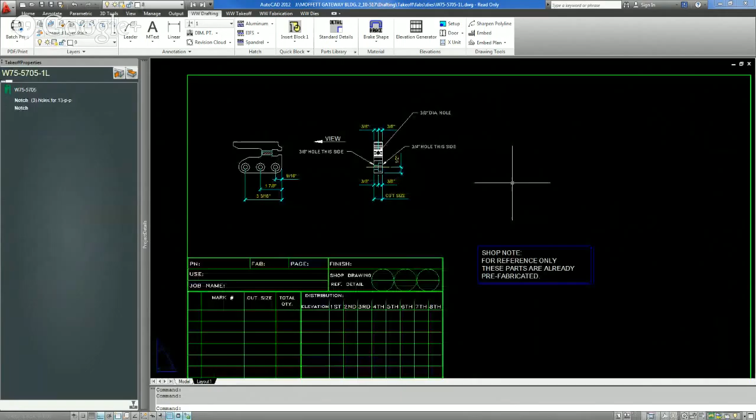Also found this die was created for our Moffett Gateway project we're working on right now, and I found this fab ticket for it, or fab template. It has some stuff on here, but as you can see, it's for a 3/8. So I'm going to make a new one for 1 inch, but I'm going to use this one as a guide so I get the holes in the same spots.

So let's go back. Back to AutoCAD here, I'm going to close this up. You can't really change this length in the BIM model. It's a fixed length part, and it won't allow you to change it. So I'm going to have to change it in the data.

So I'm going to drop all the way back out to my elevation here, and then I want to make sure my details are current. So I'm going to hit refresh there. I made some changes to this data in the BIM model, and I just want to make sure I'm looking at the data reflecting those changes.

And then I'll run UP on one of these hooks. Takes me right to it. And then I can change it right here to 1 inch instead. I already made a 1R and a 1L, so that's perfect. I plan to take whatever I draw here for these hooks and put them on the server, so I'm going to take some special care to do those right.

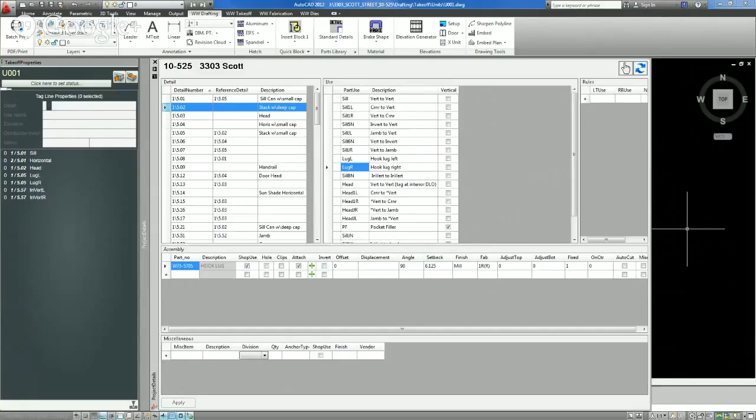All right, so UP again, so I get the 1-inch version. And save this, and then QBIM everything. Usually for units I do all. For stick walls I won't do all, hardly ever, because it takes too long. I'll do like maybe one vertical and the horizontals around it, something like that, or a couple bays, but never that many.

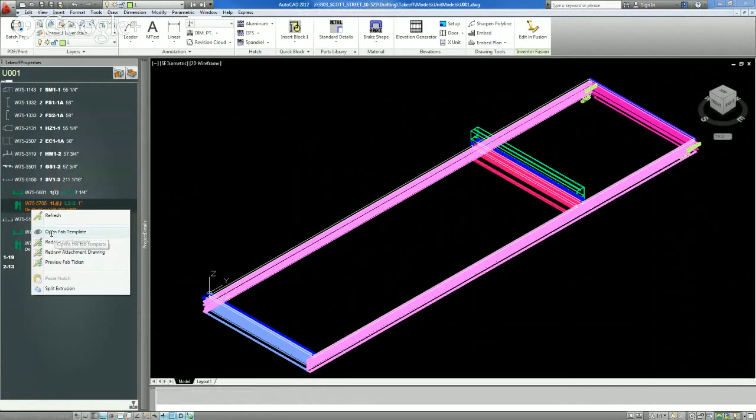All right, so usually I actually start from the top and just work my way down, but like I said, I'm going to skip to the lug right away. So let's open up this fab template. Now, the fab template is sort of a base fab drawing without any of the information in it, any of the text. And the takeoff program, when you're drawing fab tickets, will take this template and add all the text to it and produce the final fab ticket.

So this is kind of where you want to be drawing stuff because this will get repeated a lot. It'll use this template over and over and over again to make the fab tickets.

So here I want to add some notches to this thing. So I'm going to go back to the reference, this guy, and I'm actually going to start with these. I'm going to copy them over. So copy that guy and copy this guy. So I got both of them on my clipboard, and I can drop them in here.

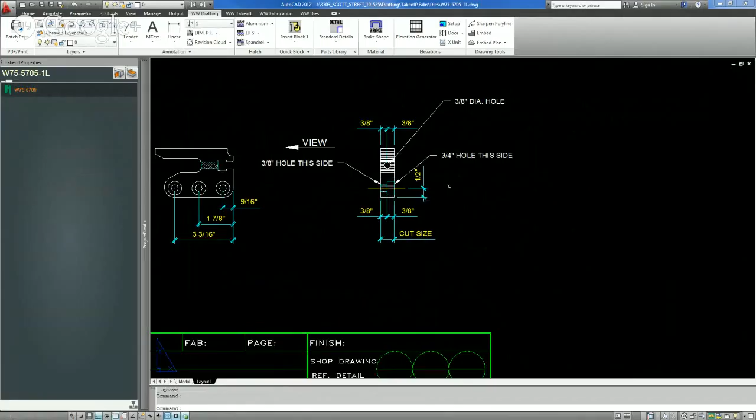Now these are wrong because, well, it drew this at 3/4, so I actually need this to be redrawn. So I'm going to save this. When I first drew the BIM model, the data said that this was 3/4 of an inch, so it drew this fab ticket, this fab template, at 3/4 of an inch. So I need to tell it that I want it to redraw this thing, and the only way to do that is manually.

So if I go back out to the fab ticket or the BIM model, it says it's 1 inch here. I can right click on this and tell it to redraw the fab template. And now when I go to open it up, now it should be the full 1 inch. You can see there, it's 1 inch.

Now all these notches are in the wrong places because it wasn't made for this. It looks like this one was made relative to this side and it kind of moved with this side as it got bigger. And then this thing was made relative to this side, so it moved the wrong way. I don't like how any of that is set up, and plus I have to change it. So I'm going to insert the geometry for these two notches.

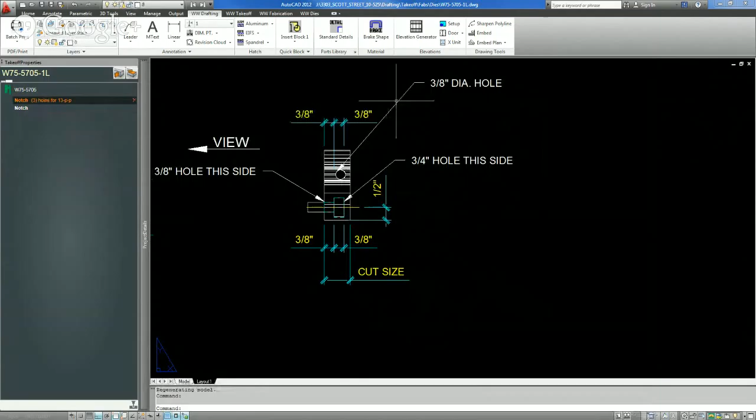Just right click and insert. That puts the solid that's used in the subtraction of that notch into the drawing in model space. Then I'm going to take the notes—these are also part of the notch—and explode them so that they're not part of the notch anymore.

At this point, I can just erase these notches because I can't use them as is. But because I inserted it and exploded the notes, all that extra stuff stays behind and I can manipulate it. So let's start with the actual notch geometry.

I'm pretty sure that this counterbore is going to stay the same depth. I'm not too sure, I'll change that if need be, but I don't see a reason why it would go to half to the midpoint.

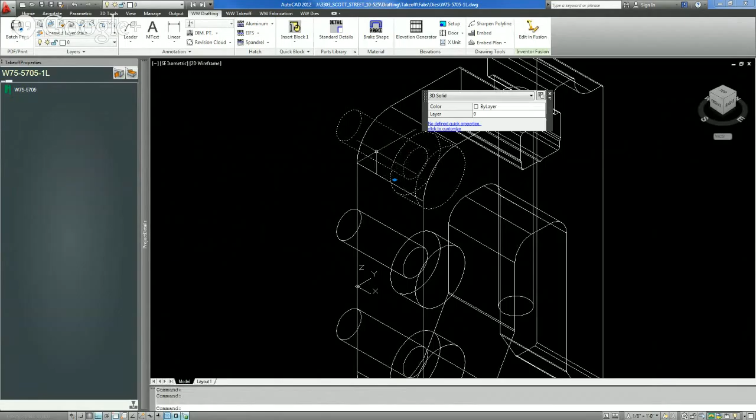So I'm just going to slide these over. I should slide them all—slide all of these over so that they're flush with the surface over here.

So I like using point filters for this kind of stuff. I only want to move this in the X, so I'll say .yz and then at. That tells AutoCAD I don't want to move in the Y or Z directions, only in the X. Then I can pick anywhere on the correct X axis, which is anywhere on this front surface, and now they should line up just like that.

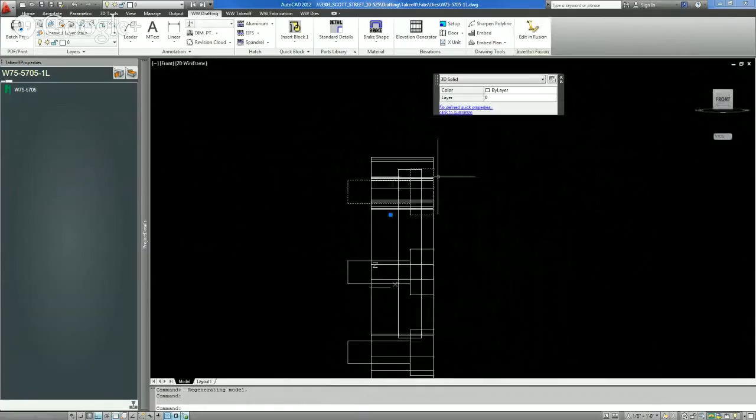You can see there. Some people will change to this view to do it, but I like to not switch my view so much. I think the ISO view gives you a good perspective, so that's done.

I do like to switch to this though to make sure my depth is right. I want to make this extra long in case someone needs more than a 1 inch lug, and long enough so that it's still a through hole. It's a full 3D solid, so I can't really edit it.

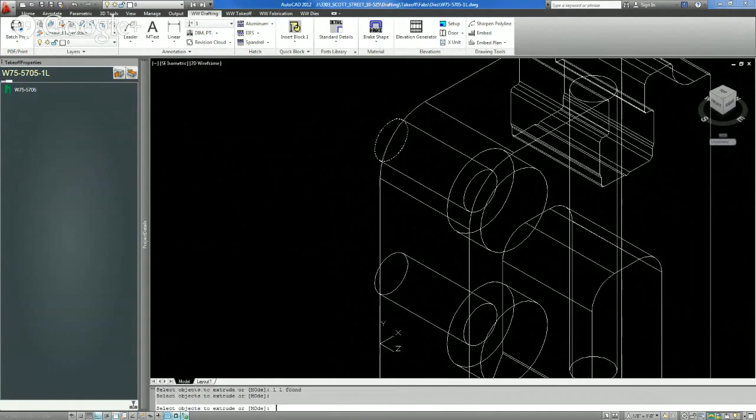I'll draw a circle at the end of it. So I'm rotating my UCS, draw a circle at the end of this thing at the quadrant, and then I'm going to extrude it out a little bit—out a lot. Let's just go out here a ways.

Then I'll—excuse me—I'll union these together, so that they're all one object.

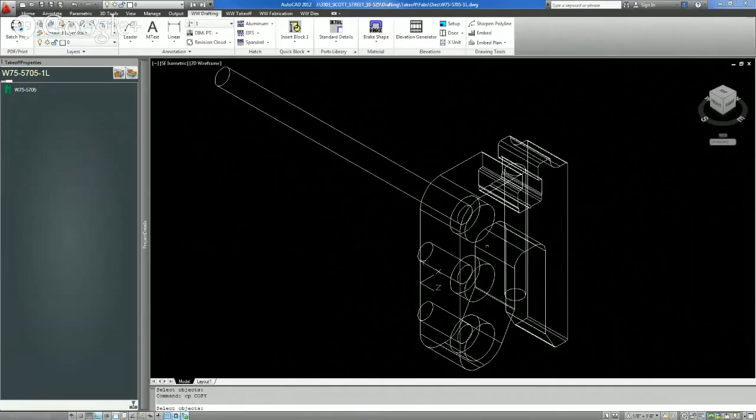And then I'll copy this from this center here to these other centers, so I have it everywhere. And then I'll erase the small ones like that.

And then I could make this whole thing a part of this notch, but as I understand it, sometimes engineering requirements will change, and then this will need 4 holes instead of 3. So I'd rather keep this as a separate notch, so you can leave that one there and swap this notch out. I do want to center this notch though.

So let's just do it in ISO mode. I'll move this, grab the center here. Now my UCS has changed because I tend to change it a lot. This time I only want to move it in the Z, so I'll do .xy and at, so it doesn't move in the X or Y.

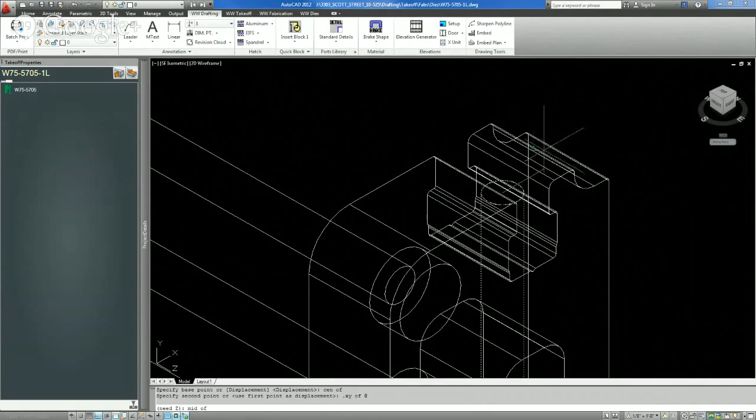And then for my Z, I'll just use a midpoint anywhere—any of these lines will work—and now it should be perfectly centered. And then that thing doesn't need to be extra long, so I think I'm okay there. Now to make the notches, use this button over here, notch extrusion.

Now when you decide to make a notch, you always want to pick on the— oh, is this the left? Yeah, this is the left. Okay, I had to make sure that this is a 1L and I'm putting the holes on the right side, so we're good.

You want to make sure that you click on the main object on the same end that you want the notches to move relative to. You saw when I went from the 3/4 inch to the 1 inch, the counterbores didn't move with this surface over here. That's because when the person made that notch, they clicked over here so that the counterbore stayed relative to this side of the extrusion.

What I want to do, of course, is put it relative to this side of the extrusion so that it moves with this side. So when I click on it, you can see it highlights only half of it as a reminder that you're using that side as the reference.

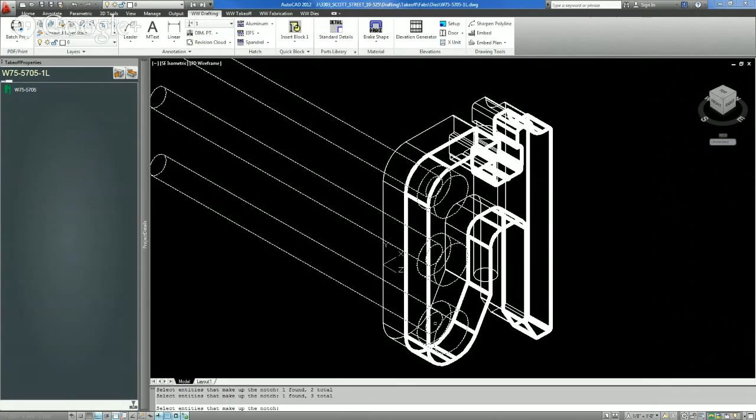And then you select the entities, putting all those 3 holes together. And then, yes, I want to add this. And now it's a part of this object. If I click over here, you can see there's a new notch listed, and it's those guys.

To manually erase these guys, I may change that in the future. So now I have this notch. It has the 3 counterbore holes. And I want to make another notch for that.

So notch extrusion, this one, because it's a midpoint notch, you're never going to win. You're never going to be able to pick a side because you always want this to be in the middle. Unfortunately, there's no way to do that. So I'll just pick a side, and we'll just have to make a new one every time the widths change or the lengths change, and delete it. So there we go.

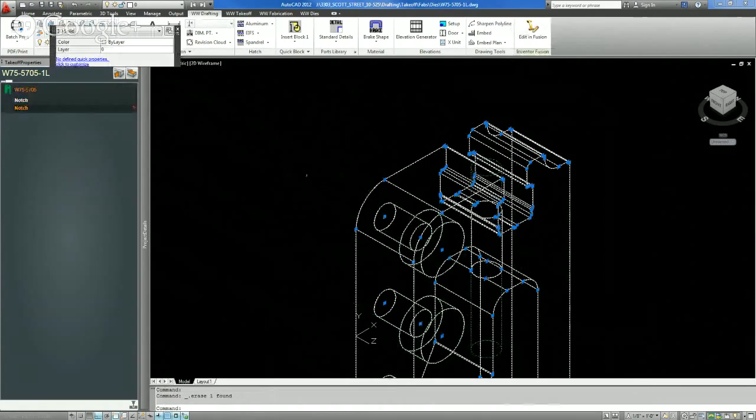Now there's going to be 2 notches here. I just have to go over here and fix all these notes. So this is not how you should be doing a counterbore. I'll fix that later. Usually don't do this either.

At least mechanical engineering wise, you're not supposed to do that. Mechanical drafting wise, just have this center line, just like they have it, I guess. I'm going to move all of these over to this quadrant.

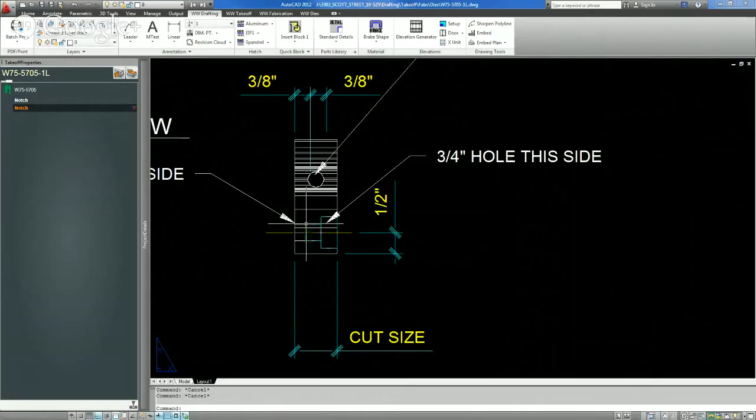Stretch these to that quadrant. For these, just fix those. This needs to point over here. I want to put this on the server, so I want it to look pretty good. That doesn't need to change.

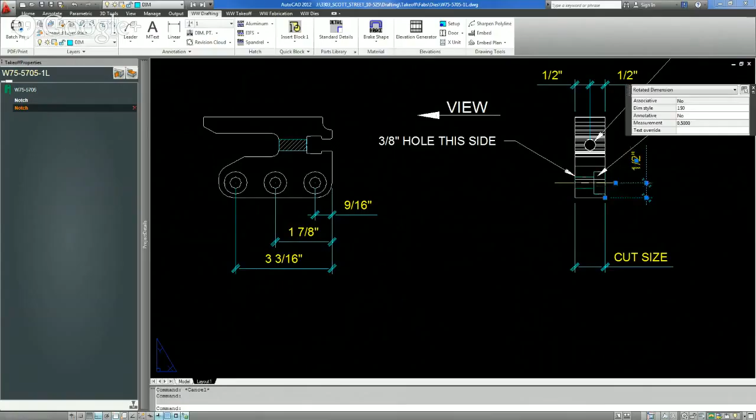That looks okay. I don't know why you wouldn't put the 1/2 inch over on this side. Let's just do that. I'm going to put it outside.

I like doing dimensions like this where you can see what you're dimensioning to, the geometry of what you're dimensioning to. I don't like dimensioning to things in side view like that. Sometimes you just do that because there's space restrictions and other considerations.

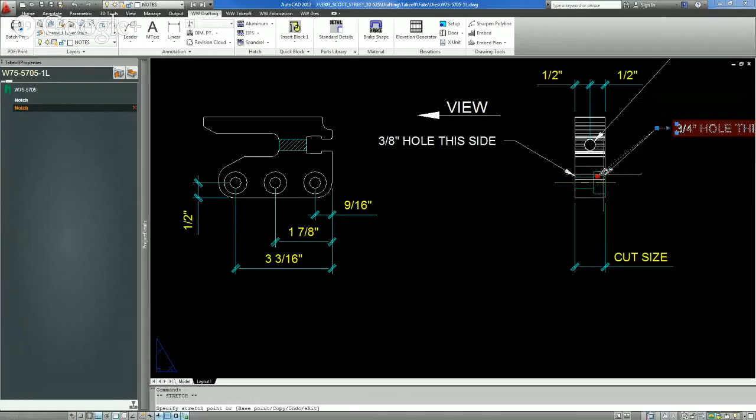But see how this looks hidden. Looks all right. Now I really don't like this. Should just say 3/8 inch hole on this side and then counterbore 3/4.

There's a symbol for counterbore, which is not in my list here. And that's lovely. Maybe that's why they did that the other way.

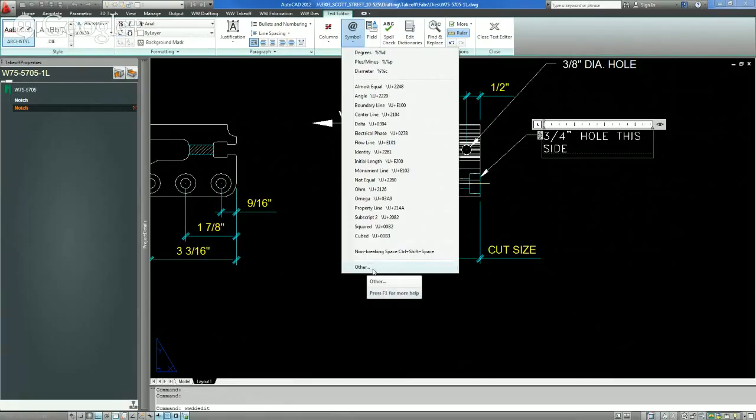Let's see what other means. They just bring up the character map. That's unhelpful. Man, I thought there was a way. I don't remember how to do that in AutoCAD anymore.

There's a symbol for countersink. There was a symbol for counterbore. I guess I just won't use the symbol. So it's a 3/8 inch hole with, I don't know, 3/4 inch.

3/8 inch diameter hole with 3/4 inch diameter counter bore, 3/8 of an inch deep.

Symbols for counter bore, there's a symbol for deep, there's a symbol for diameter, but I don't think we use any of those. So I don't think I've ever done a counter bore in this company. So it's all kind of an experiment. Let's, can't get that to go right. Whatever, yeah, I don't like that either.

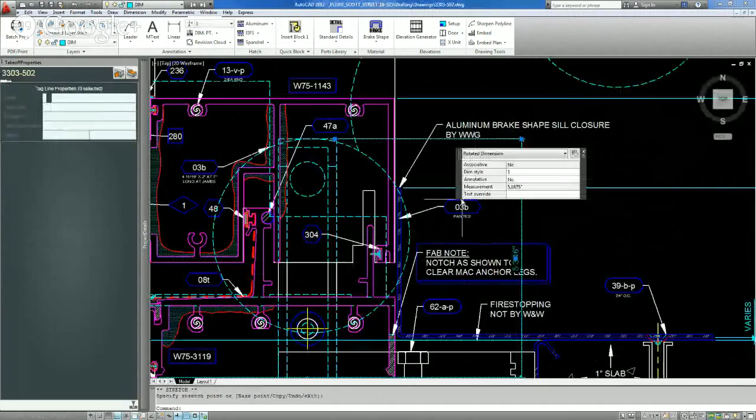Let's take a look at the detail, because some of the details are kind of inconsistent. We did find it in a detail. If I go back to, I think it's 556 or something, no, I'm just guessing.

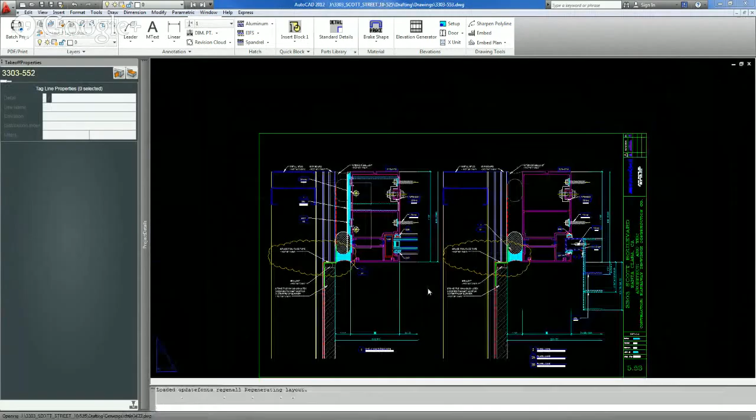There was a detail that showed it, but sometimes it shows it at 3/4, sometimes it shows it at 1 inch. Let's see this one, this one's 3/4, and it's showing the 3/8 counter bore, 3/8 inch deep counter bore.

But then on some of these details it shows 1 inch, and the checker found this for me. I just don't remember what detail it was. We saw it on a different elevation, like this. See, that's a 1 inch, but it's still a 3/8 inch deep there.

So it's calling 13 pp here. Let me double check, make sure 13 pp. Yeah, that's a, well, doesn't really say. It's 13x. Let me pull in 13 p. That gets me really worried.

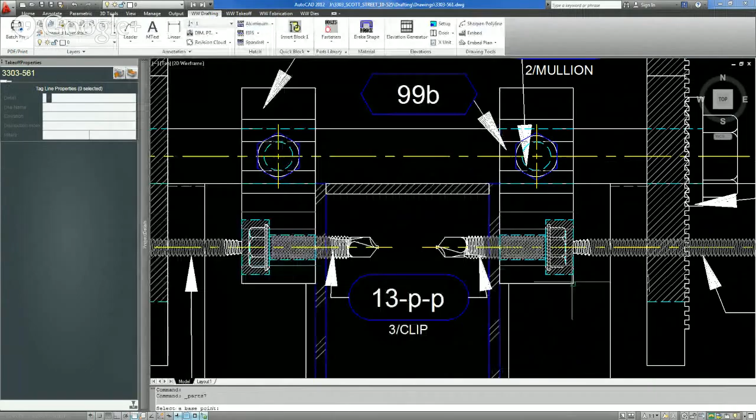Let's see what a 13 pp actually is. It's 5/16, 1.5 inch. That's not a 13 pp at all. Wait, I got it on the wrong spot. Move. Yeah, 13 pp does work.

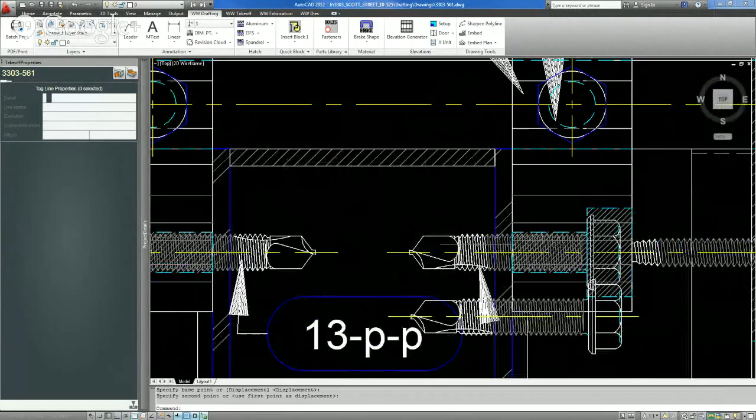Just want to make sure that it goes through here with enough of the gray threads, because you're not supposed to fasten to the white threads. Those are hardened for drilling.

It looks like it's the right size. Not sure why the picture says X.

See, that's 13px. This one's 13xx. I have no idea where that came from. Let me line these up. I've got to make sure they're the right diameter now.

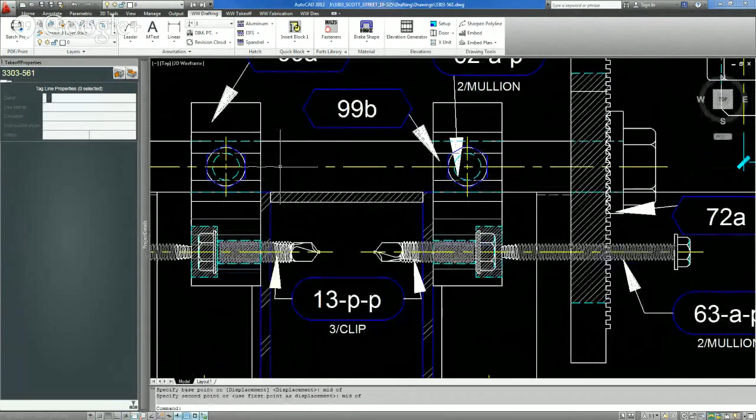They look identical. Not sure why that block is a different name. Well, 13pp sounds right. I don't know what they took off, but if they follow the detail, it would hopefully be 13pp. Let me check a couple more details, because I think some of these details are inconsistent.

Here's another 1 inch. It's calling 13pp. I wonder what 13xp is. Let's look that up.

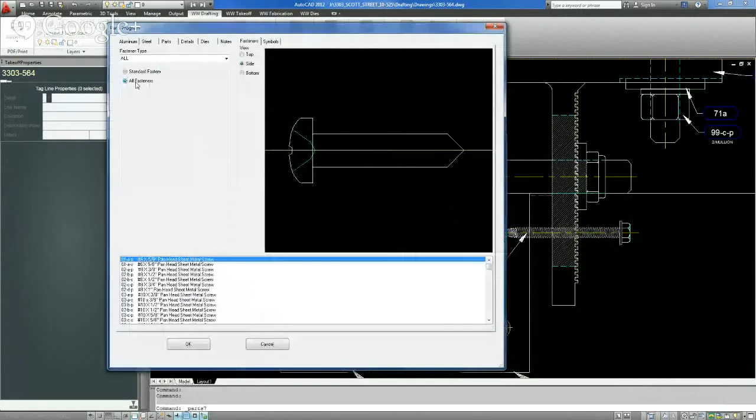Gonna work out through the list. 13xp is the same size with different thread count. Same length. Let's see, one's 24, one's 18.

They probably both work. I don't know. More threads is better, right? Stronger. So worst case scenario, we got too much rather than too little, which is a good situation.

Just find that interesting. Oh, sounds like 13pp works. So it looked like it was 13pp on a couple of these details now.

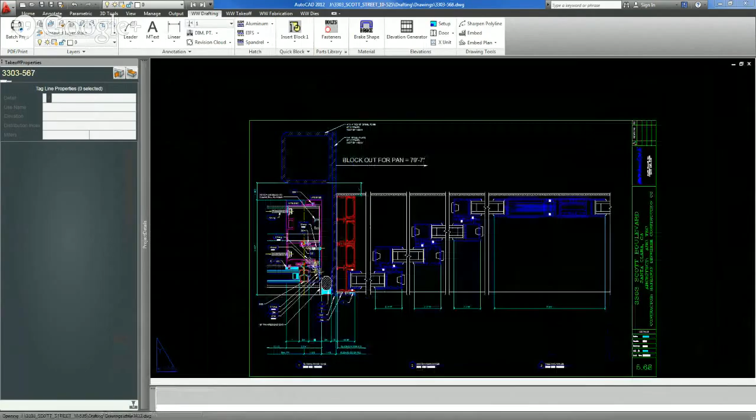Yeah, see, this one's still drawn at 3/4, but we're going to do 1 inch everywhere. So it looks like 13pp is the original size, so it didn't really have to change.

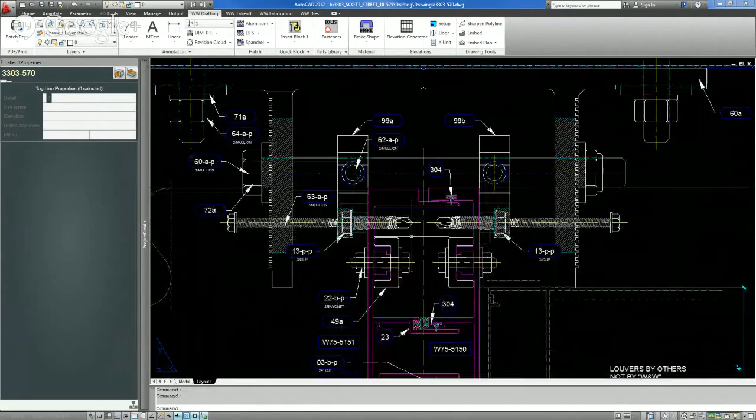Okay, I'm satisfied that what we're drawing is okay. That's the reference, let me close that. I don't need that anymore. Oh, I do need this note though, so let me copy that. That's not part of any of these notches, so I need to copy that over it all. Paste that in.

I'm satisfied with this. Can't find anything else wrong with it.

All right, so I'm going to add some notes for my notches. Since I plan to put this on the server, I'm going to do that. I'm probably going to do that for all the things I make for this setup, so that the person who inherits this thing will kind of see what I did.

3 counterbore holes. And then this notch here is the... I don't know what I'd call this.

It's an adjuster screw, right? 3/8 inch adjustment hole, sure.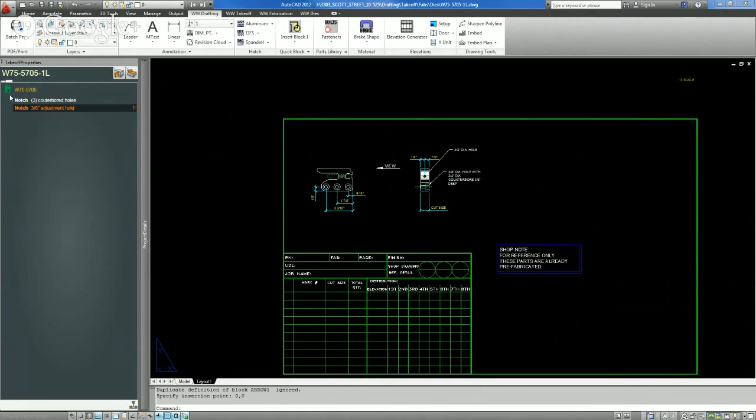They put a nut in here, and then they run a screw through here, and then that screw they can put it down to lift the unit up or set it back to drop it down. So just call it an adjustment. That sounds pretty good.

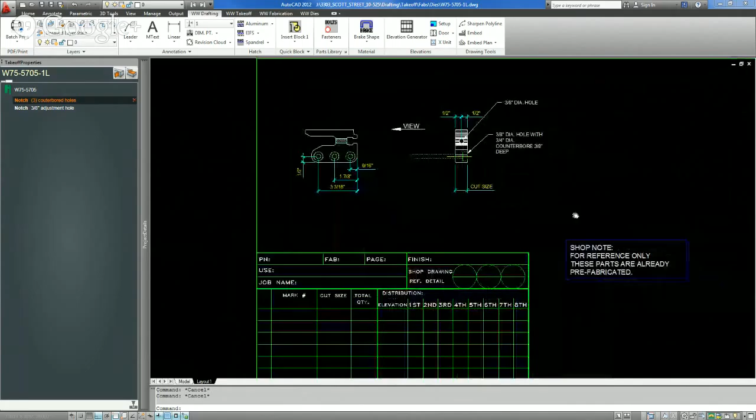And then I want to attach all of the appropriate notes to the notches here. So, edit note. This makes it so that the notch subtraction comes with the notes, so that when you copy them around, they move together. So I'm going to add to working set.

I want this note, all of this stuff, and all of this stuff, like that. You can see it gets bright, showing that it's a part of this thing. And then save changes. So now when I select this notch, it highlights all the notes.

If I erase this notch, all of these notes disappear too. If I copy that notch, the notes come with it. It's really, really handy.

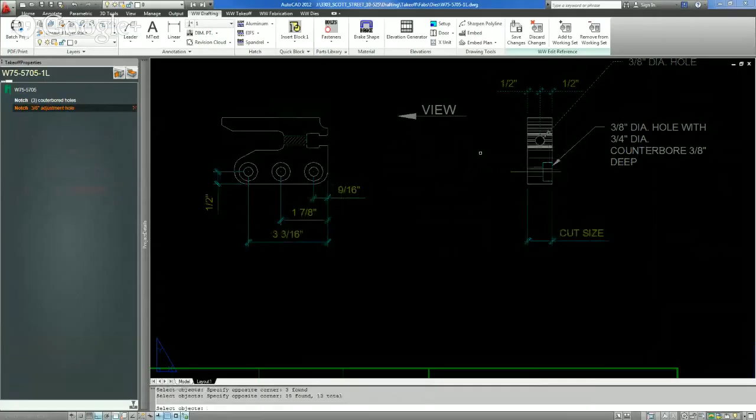Do the same for this. Edit note, add to working set. I want these guys and this hatching here that shows that it's through. Save changes.

Okay, that's all we need on this fab. Yep, can't think of anything else, so I'm going to save that.

Now what I want, I'm going to make the 1R fab now. And it's going to use this thing, but it's going to be mirrored to the other side. So I'm going to mirror copy this.

And then for this thing, I'm just going to copy that. So I'm going to add that as a copy. And then I'm going to close this.

I guess I could go on to the next one, but I'm pretty sure I'm going to have to redraw this fab template. So redraw the fab template here for the 1R and open fab template.

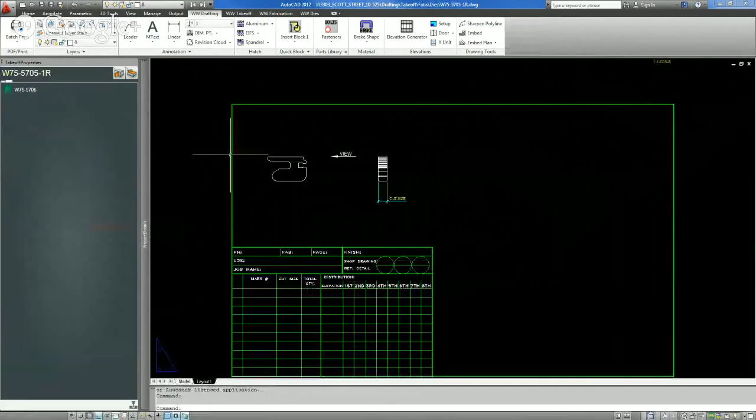There we go, I can paste all these notches. So there's a little bit of a mirroring problem.

It assumes the part is the full 30 inches, or 10 inches in paper space. So it always mirrors the notes like this, but that's easy enough to fix.

Just go here, I edit the note, and then I can slide all this stuff over.

Just like that. It worked out fine when I mirrored it.

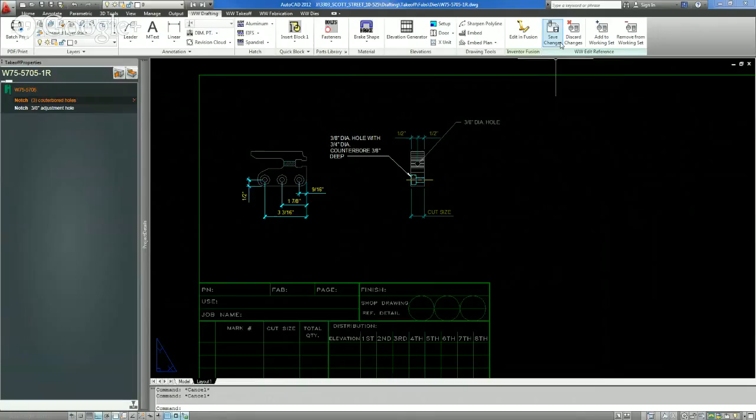Oh, you know what I want to do? I want to add hidden circles on the other fab because the counterbores are hidden. So let's do that after this.

Because I added the notes to those notches, all the notes came in. It's really a time saver, especially if you have a lot of variations or little adjustments to do on your fab templates, to be able to just copy the notches around. It's really handy. Let me go back to 1L.

So I'm going to need to copy this too. I haven't forgotten that, but I do want to add in, because when I hide this, if I do HA, you can see you only can see the small hole here. I want to add a hidden line so that you can see the big hole, so you know there's something more to this thing.

So let's do edit note. Once you're in edit note mode, anything that you draw will automatically go inside the note. So I like to start it first and then start drawing things, because I find it easier than having to run another command and add these to the working set. I can do it this way.

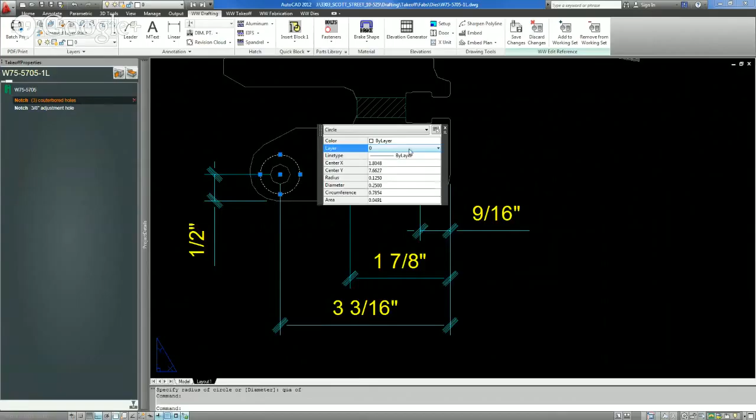Layer, I want hidden. And I want to copy. Last, center, center again, center again.

I only like to run snap endpoint because that's the one I use the most. I guess I could turn on center, I just haven't gotten around to it. Maybe I'll do that now.

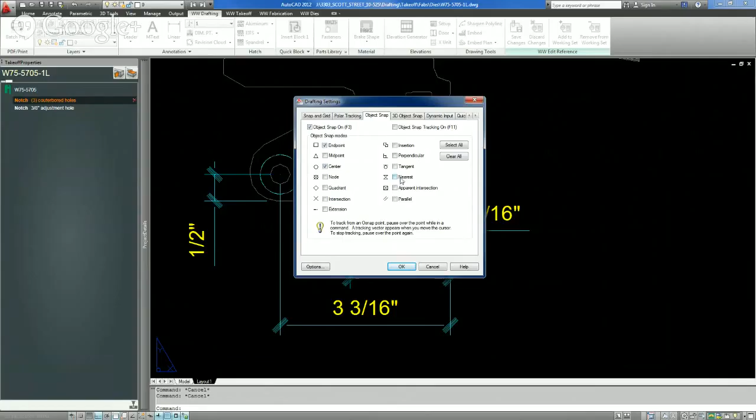So for running snaps, yeah, I usually only have endpoint. Center doesn't really bother me having that on all the time, so I'll do that. But midpoint drives me crazy when it's on. Perpendicular does too. Nearest is probably the worst thing to have on all the time. So I like to keep it pretty simple on that side.

So I'm done with my changes. I just save them. And now when I do the hide, I can still see the hidden line there, and that makes me feel better about the whole thing.

Save this one, and I think I'm done with those two. I'll put those on the server later.

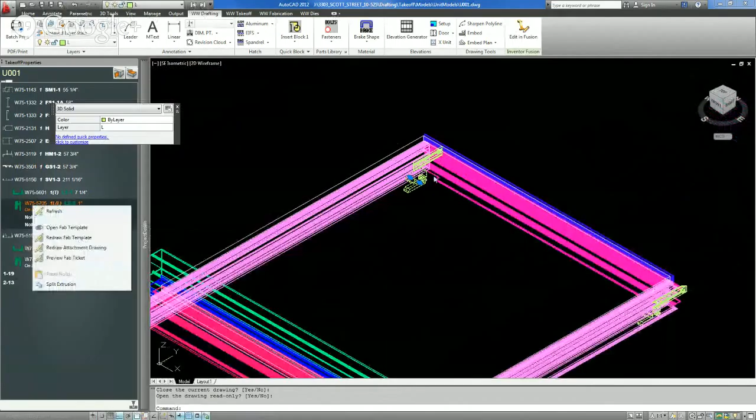So now that those are there, you'll notice that they're not in this BIM model. That's because I made this BIM model a while ago. I could right click here and refresh it, and that brings in whatever I did on the fab templates onto this model. But I'm just going to back out and go all the way to the beginning. I don't really have the UPD because I didn't change any data stuff.

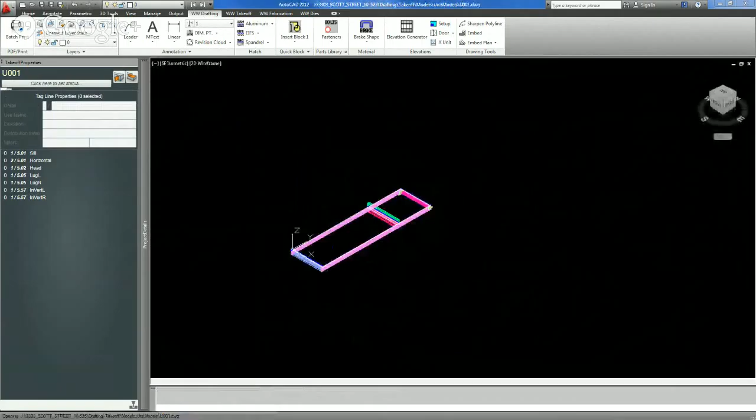QBIM this. It's going to redraw the whole unit again, and it should have the notches. It's a good time to check to make sure I counterbored the right side. It looks like I did. You can see them from this side. You can see the hole.

You can see the counterbore, extra large. And then again on this side. So looks pretty good.

So I'm just going to go down this list and fix all the fabs, starting with this guy. This is the sill. I don't think I actually have to do anything on the sill except possibly add a gasket. So let's just open it, take a look. It's pretty basic. Looks like there's a gasket there too, and I'm going to have to add that gasket.

We only add the inside gaskets onto the fab tickets. So, and this is fab 1. Let's just do that real quick because I know I'm going to have to do it.

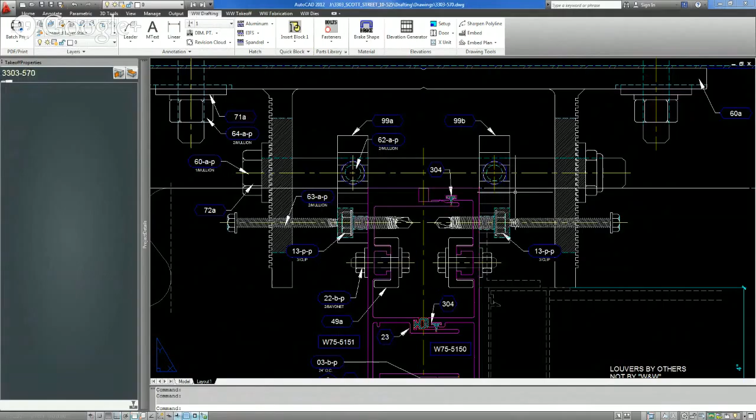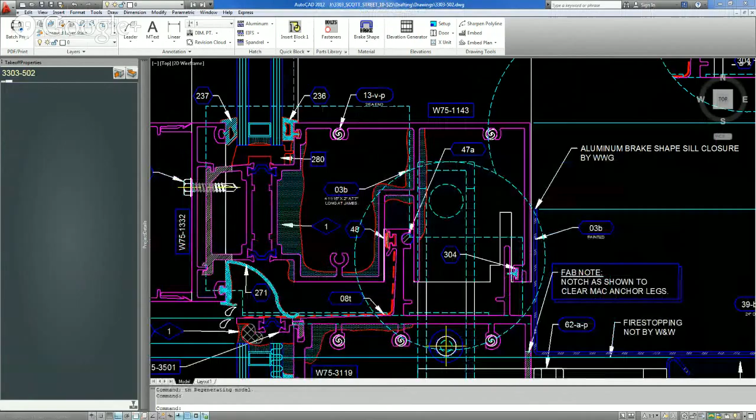So the way I usually do this, I don't know, maybe someone has a better way, but I tend to go to my detail and just copy them out. Ultimately, it doesn't really matter what it looks like as long as you're calling out the right number. As long as I'm calling out 236 and whatever this one is, 304, it should be fine. But I like to just get the graphics out of this.

So I'm going to copy all this from this inside glass pocket there. Grab those guys and this. I'm not going to grab these because they're going to be the wrong scale.

I insert it. I want to insert it at the same glass pocket right there. So I got one here and I got one kind of hiding out over here. And then I like to rotate them first, so rotate both of you guys around the same glass pocket. And I want to go this way. Yeah, like that.

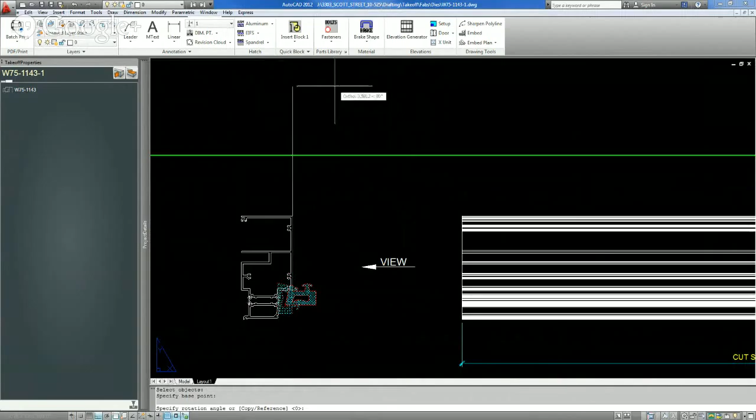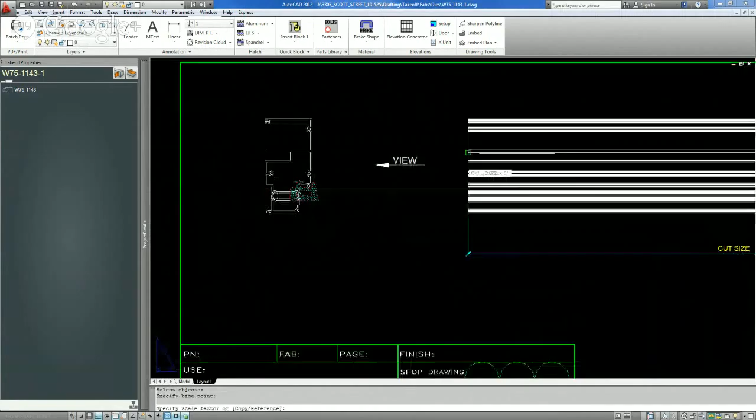Yeah, just like that. I want to mirror previous around that glass pocket again. Erase source, yes. Then I want to scale previous around the same glass pocket, and the scale of this drawing is 1/4. Bang, they're both in position. This is where having 2 monitors is really handy. 236 and 304.

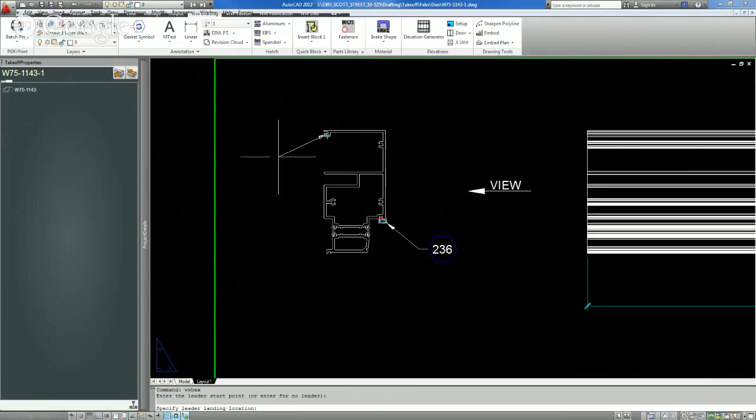So I'm going to drop in the gasket symbol, 236. I think I'm okay pulling it down here. I'm trying to anticipate where other notes or features might need to get added to this fab. I think I'm pretty safe throwing it over here because there's no surface for me to attach something, so there won't be an angle or anything like that. Over here, I probably want to pull this further out. There could be...

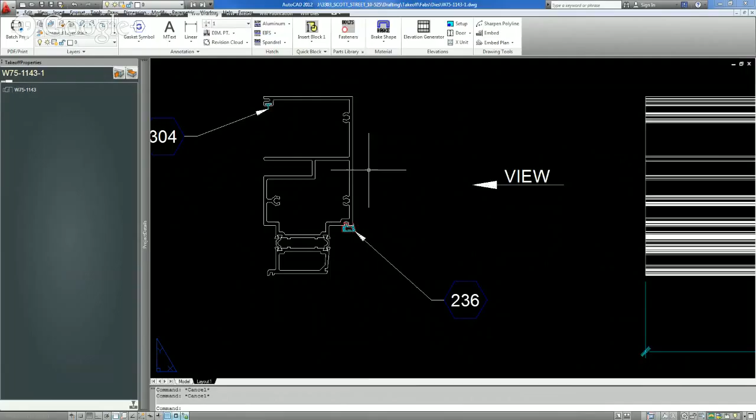...an angle, maybe an angle in the front, something like that, at a parapet, or maybe there's some kind of thing here. I'm a little worried about this one. I don't want to put it over here because I don't know what kind of angle might be coming off the top of this on other fabs. This is Fab 1, so I'm trying to think of those kinds of things because this is going to be the basis for all my future fabs.

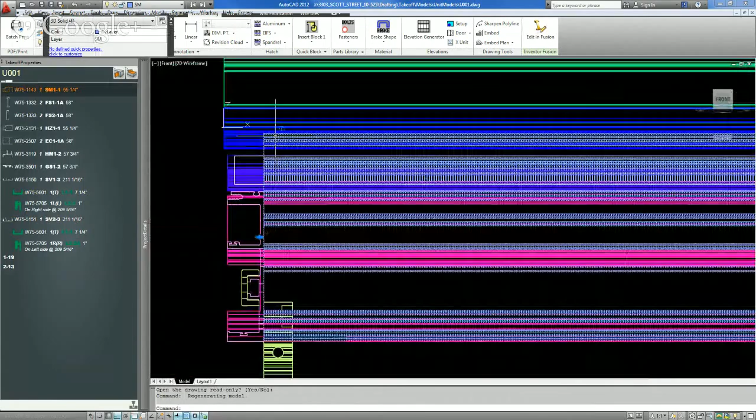As far as notches on this thing, let me save that and go back to the BIM model real quick. We decided, I think, that there were no notches on this, so this is the light blue part, and it just runs straight. Because this is Inviso to Inviso, or structurally glazed to structurally glazed, there's no face stops out here in the front, so I don't have to make any clearances like we did on captured to captured stuff. I don't think there's anything else to this fab. It's just straight cut with gaskets. Best kind of fab.

Now there may be a situation where I need to turn on the chart at the top because there's some attachment at the top of this thing, but I'm not going to do that on Fab 1. I might make a Fab 2 or something that has that, but that's up for the next person after me to deal with when they run into some crazy unit.

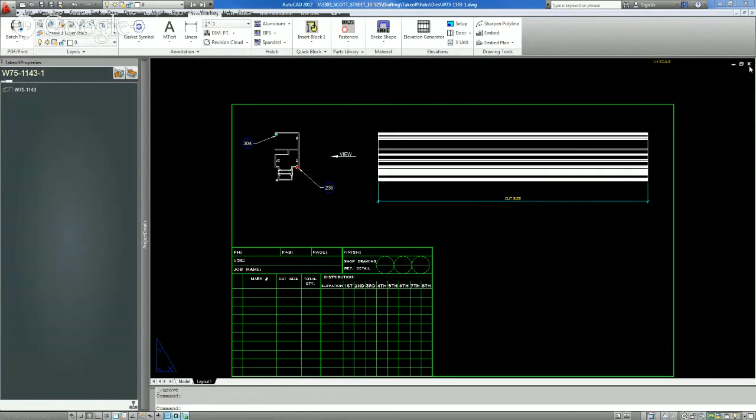Happy with that one? Okay, so after the sill comes this piece, which I don't know where it is until I go over here. Okay, so it's the face stop on the horizontal. I made this Fab 2 because I wanted to put that 1/32 short note.

This is an outside part, so I don't need any gaskets here. There's no notches to speak of that I can think of because we don't weep these anymore, since they just run out the sides. So I think all I need is that note.

So there's probably a place where I can copy it. I don't think I have it saved on any one of these, so let me go grab one. I'll grab it off the standard one on the server. If you open, you go to S drive, fabs, and then probably the most common one is going to be Fab 2 of the face stop, the W75 face stop, whatever that is.

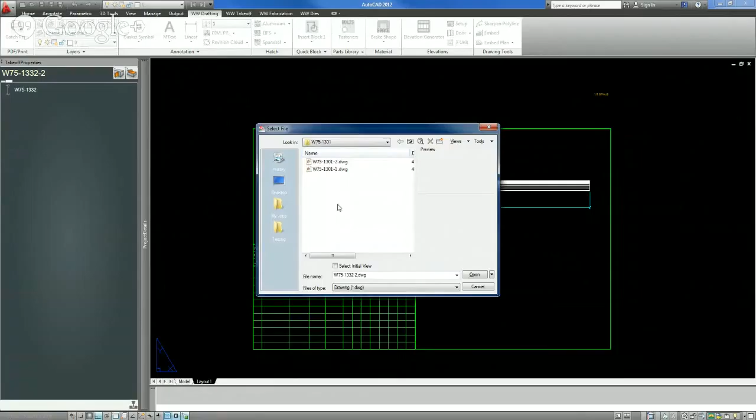It should be 1301. Fab 2, let's see, it has that note down there. That's what I'm looking for. Cut part, 1/32 short of cut size. Copy that. Actually, let me put it on my block thing.

I hardly ever use my quick blocks because I usually just use Control-C, but I think I'm going to make a permanent home for this one because I do use it a lot. So I'm going to make that. Yeah, I'm never going to remember that. Yeah, whatever, you got to put it on Block 1.

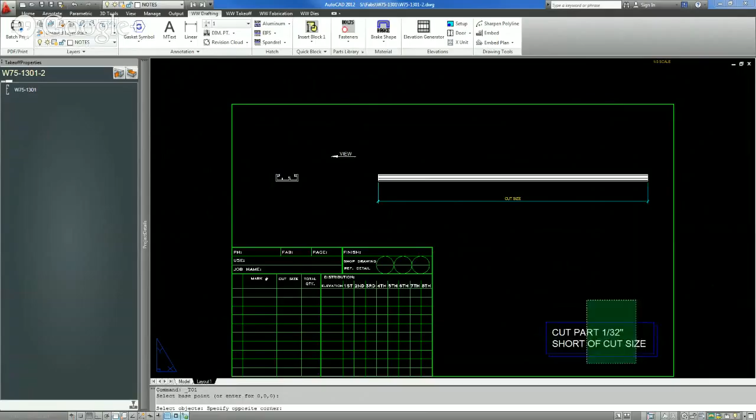Cool, and I'll erase this or close it without saving. I have access to the S drive, so I don't want to save the fact that I got rid of that thing. Paste it in. Oops, Control-V, insert Block 1, hit enter. There we go.

Nothing I can think of. There's no holes that go in here at all. They usually go on the cover if we run like a flathead to secure it. I'm pretty sure that's not the case on this job. Well, it might be the case. Actually, that thing's pretty big, it probably has that. Should probably look at the details too.

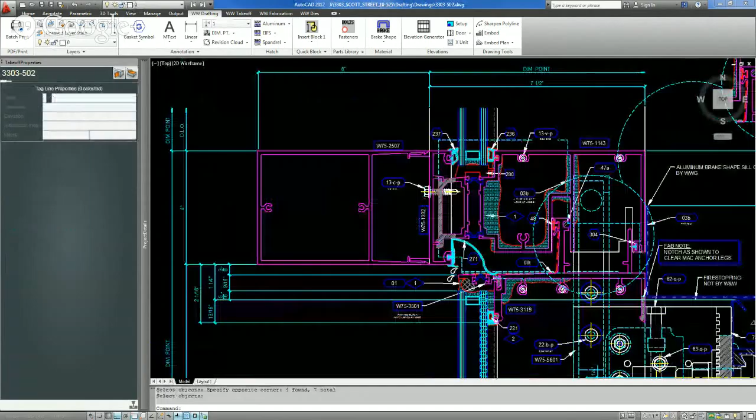There's no fastener here. Ooh, what's this? There's a fastener there. Is that on the horizontal as well?

Bad when you assume—yeah, there is a fastener there. I'm guessing that's to help support, because this thing is going to be sticking out here quite far, and they're not trusting these little hooks with it, so they're putting a mechanical fastener 24 inches on center.

It's probably only going to be at the places with these hooks, so I can probably just bake this right into fab 2. It's probably going to be on fab 1 as well—fab 1 being the one without the 1/32 short note.

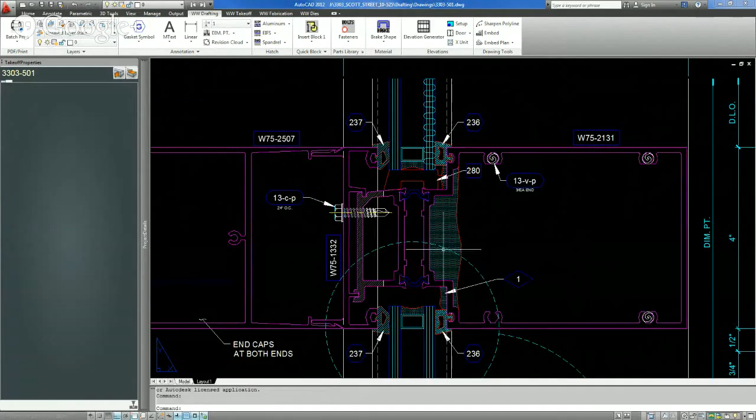Oh, look at that—they drew a notch here, but W75 doesn't do that, so I'm not going to put that in. He just hatched it. I think that's just leftover hatching. It shouldn't notch over, there's nothing to see.

We used to notch that over on the all-wall because you could see the bottom of this, but now the cover is designed like this, so you can't see it. So I think you can just straight cut them now.

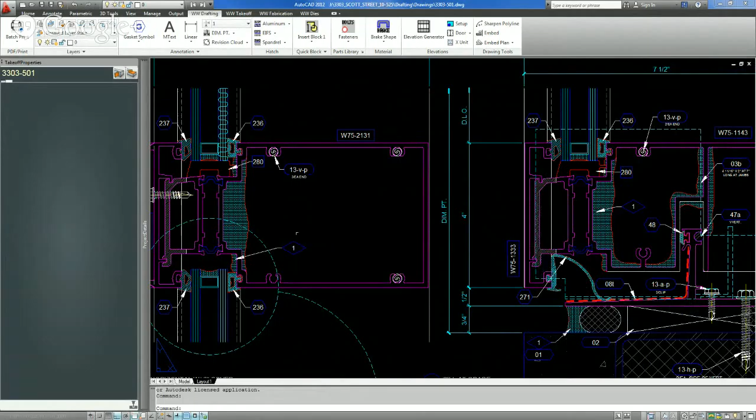So I'm going to put that screw hole in. I missed that. Now this is a drill flex, so I only have to put the hole here, and then the screw itself will cut into this wherever. So let's measure where that is.

One 7/16—it's not really, but I'm going to put it at 1 7. Now I'll probably go... yeah, I'll go 1.5. That'll drop it down a slight bit, but it'll still hit this. I don't want it to be up in here, so I'll just do 1.5.

And this is a 13-v-p, which is—use WW tooltips. When you turn that on, you can mouse over these things and it'll tell you what it is. It's a number 12. And I have a thing printed on my wall that says a number 12 for a clearance hole is a 1/4 inch hole—at least that's what we do.

So I need to call it a 1/4 inch hole, 1.5 inches down, and that's on this guy. So let's open up the fab template back up.

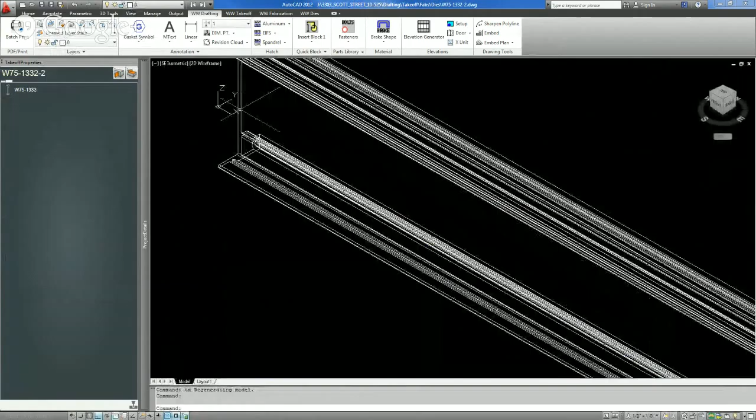This is an on-center hole, so there's an argument to be made that you don't have to draw any hole here. I like to draw it anyway, just because I can see it on my BIM model. I can copy it where if I need it in other places. It seems a lot more convenient if there's an actual hole here.

So let's just drop that in. I'm going to rotate my UCS around—UCS, draw a circle, right up here is fine. We wanted a 1/4 inch diameter circle. Move that down, directly down 1.5 inches, and then I'll extrude it.

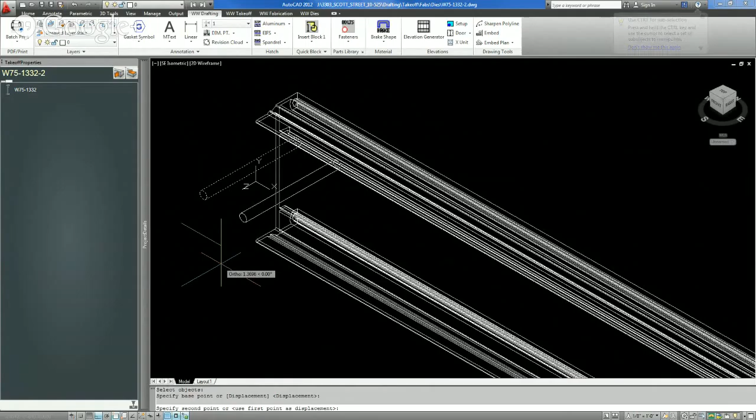This way, and then I'm going to slide it over. Usually the shop will do 3 inches from each end and 24 inches on center—that's usually what it means. So I'm going to move it over 3 inches, just like that.

This hole might not even be in the right spot, so you might actually have to move it over and have it say 4 inches or 5 inches from each end. So that's another reason I like to have that hole there.

So let's make the notch. I want it coming from this end. Oops, cancel that—I want it coming from this end. I've only highlighted that end, and I want that, and it puts the hole in. Done—erase this guy. Now I have that.

A little hole there. I'm going to use my fabrication hatch faces command. That allows me to pick this face here inside the hole, and then it hatches it in paper space for me. I don't want it in this view.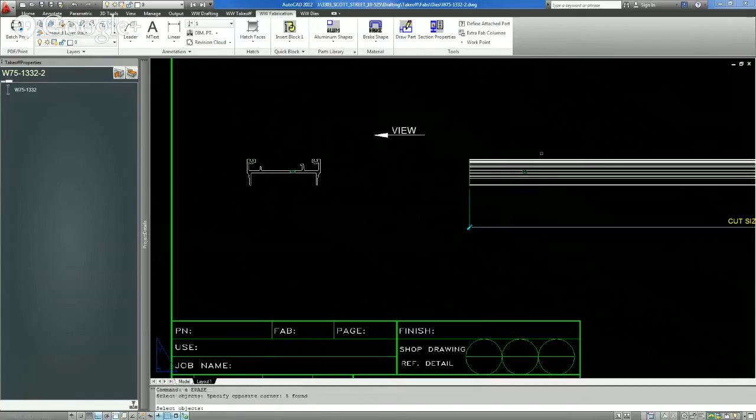I only really want it in this view. In this view it's going to be hidden, or like the white lines will be hidden. I just want to see it here.

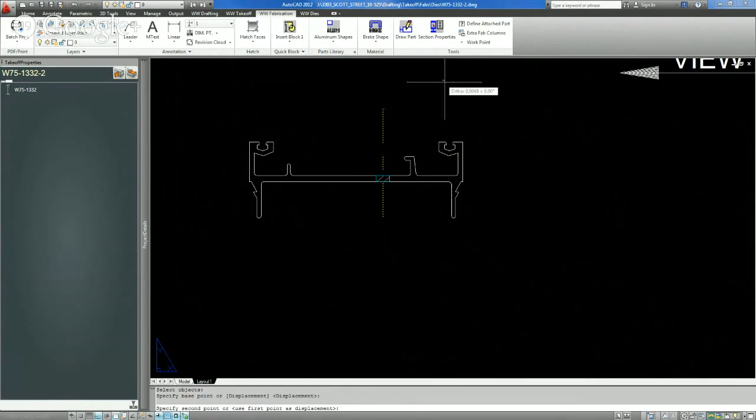Draw a line—center, this is going to be my center line. Change this to center line layer. I made it long enough to actually have a dash in it. Center that up, because I'm crazy. Draw dimension.

One and a half inches. And then I need a leader. Now, drafting-wise, it's not technically correct to start dimensioning to hidden objects, but we do it all the time. I still try to avoid it wherever possible, but if I was trying to avoid it here, I'd have to start another view, and I really don't want to do that. So just do it like this.

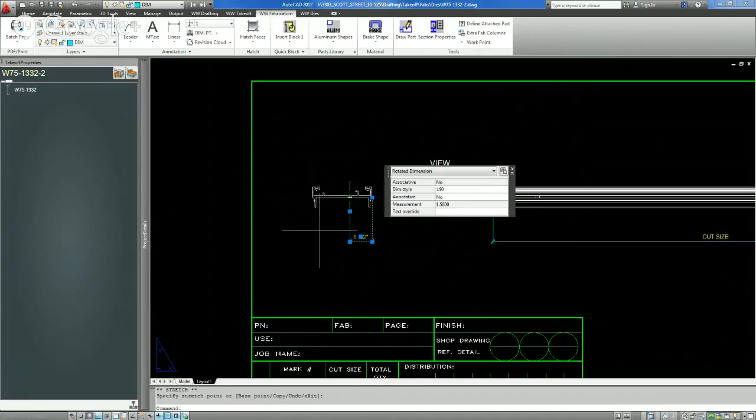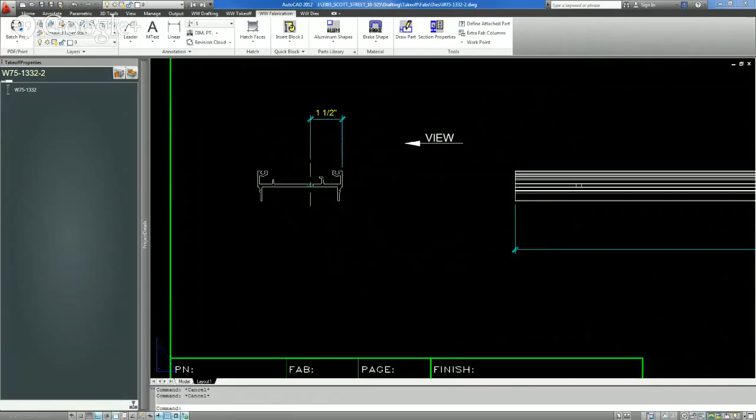There could be angles and stuff coming off the front of this, I can conceive of maybe. This does have hooks on it, so there's extended cover going to be here. So it's unlikely that there'll be something there, but it's even less likely there'll be something on the inside. So maybe I should drag these over to the other side like this. That seems a little more flexible, less likely to interfere with anything. And then I'll also put my leader on this side as well.

And this is 1/4 inch holes, 24 inches on center. That's all the shop needs. They assume it's 3 inches from each end. And I'm going to verify that because I can see where this hole is on my BIM model. I'll see if it actually works at 3 inches from each end, and everything's good.

Now, I should have turned on my edit notch before I drew all that stuff, but it's not too late. Edit notch, enter working set, let's add all this stuff, including the hatching. So that, save changes. And then I want to put a description here.

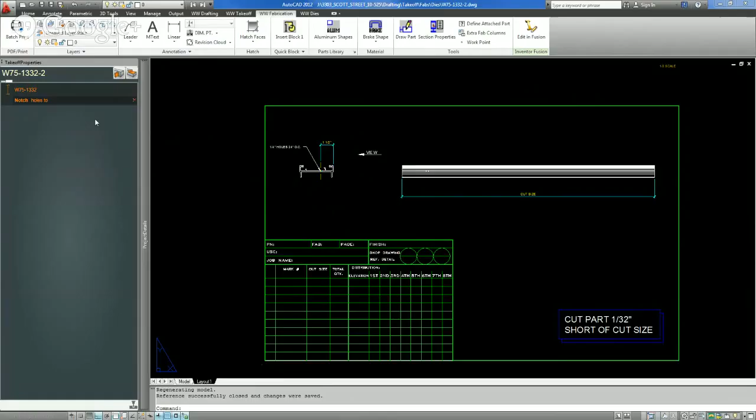I like to say what it is, what it's for, rather than the size of it, just because it's easier to know if you can delete it or not. Holes to attach to the horizontal. Yes. All right, that's good enough, I suppose.

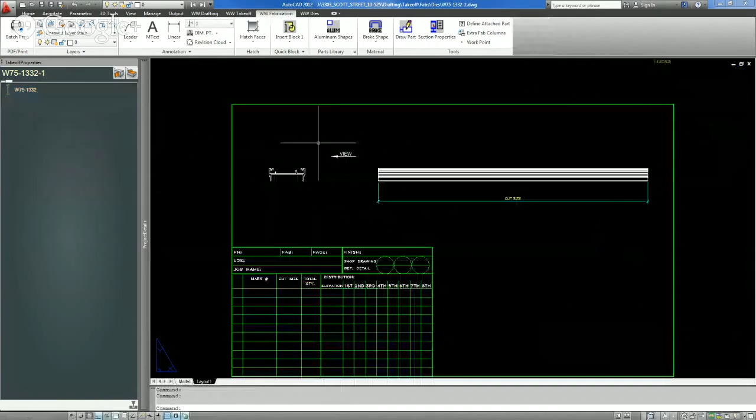Save this guy, still 1/32nd short. I can make Fab 1 right now and save myself some time. So I'm going to copy this here and do an OP. Here's Fab 1. Fab 1 doesn't have anything because it's not on this actual unit, but I'm going to paste this note in here. I don't want that note. That's the only difference between the two templates. And save it.

All right, I'm happy with that one now. This one, this is the face stop at the sill. This is also Fab 2. I don't think there's any notches on this. It's kind of the same situation. There won't be a hole here because that's all visible.

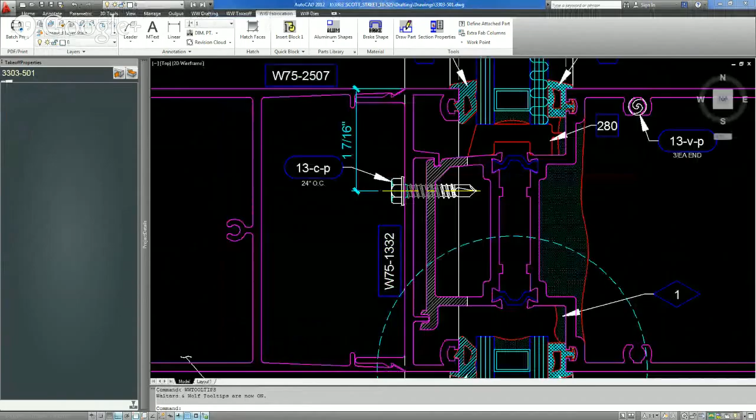Let's look at the detail briefly, see if we can see anything. So here's our horizontal. This is a wedge gasket. Looks like we're going to have to put this gasket in there, so let me copy that one. Oops. Base point here. Let's grab this thing. I don't know if they're actually going to run that in the shop before the assembly stage. It seems kind of fragile, but let's just put it in there.

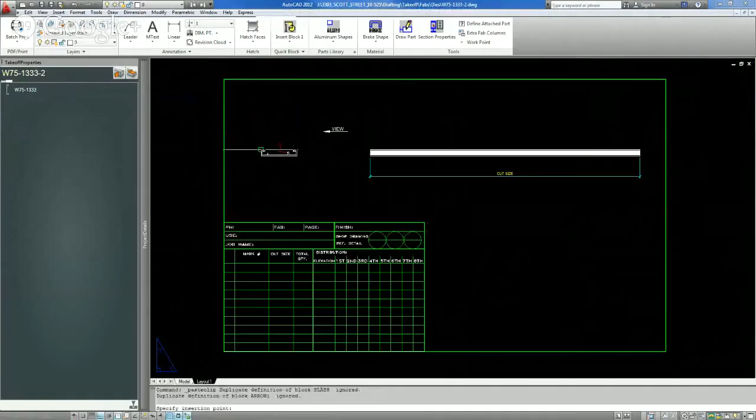They can definitely install it if they really wanted to, or just leave it up. Here, rotate it from the same point this way, scale it on this point, and this is a 1/3 scale template. Those sizes are figured out for us automatically, so it's still in the wrong place. Oh, that's interesting. I must have clicked it from over here. Not that important.

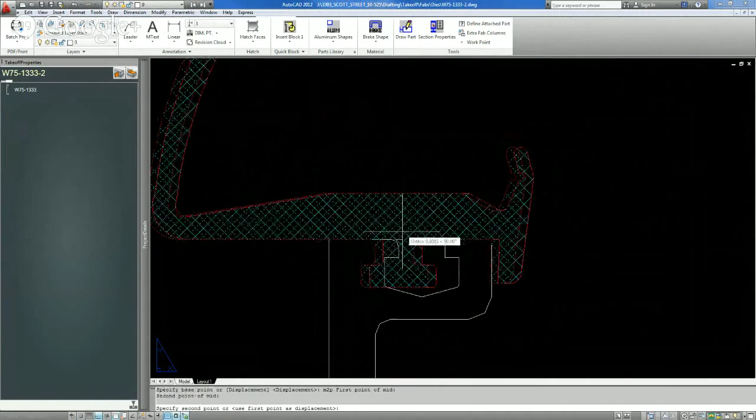Use M2P here. Grab the midpoint of that gasket thing and then M2P here. And then I get a perfectly accurate location, centered perfectly. And then I got to call this out. This is Control Tab through all my drawings here. It's 271. That sounds interesting. Wiper gasket, a stack joint. Sounds right, 271.

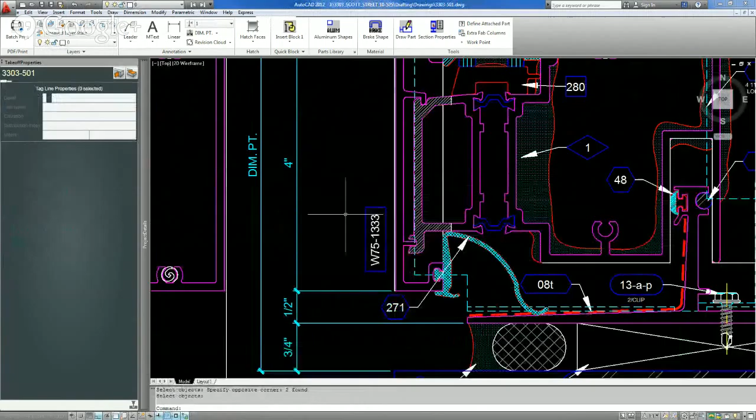Save this, and then I'm going to copy this gasket and fix Fab 1 right now. I'm doing a setup, so it's kind of important to do the Fab 1s and make sure they're good, because that's kind of the basis of all the future Fabs. So if I don't do Fab 1, then I'm really not helping them much. I'm just getting them the 1 unit and anything like that 1 unit, but all the stuff in the future that I'd have to drop in this gasket or do what I just did. It's just much easier for me to hit this right now.

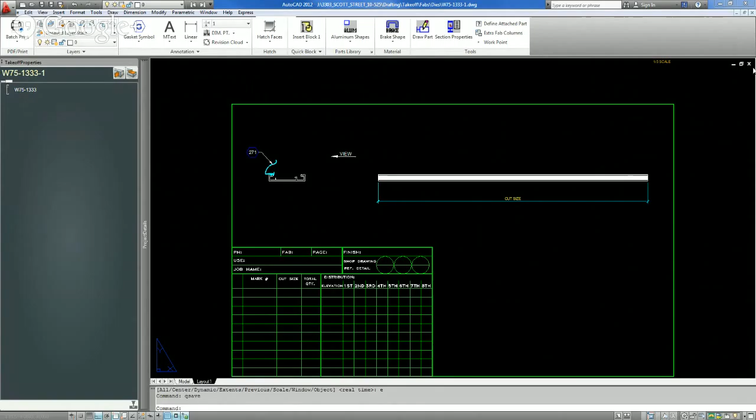So Fab 1, gasket, no thing over there, and then over on Fab 2, it was the other thing. So that's 3 Fabs down. This Fab here, this is the horizontal body.

Well, I'm getting pretty close to an hour, so I'm going to stop the video here. In part 4, I'll continue with this process and probably get through the rest of these. Thank you very much.